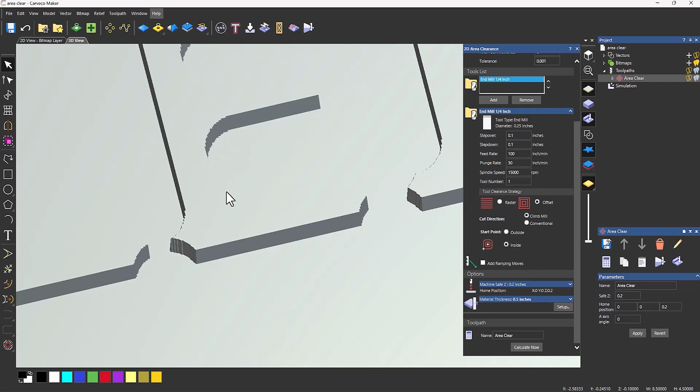Now, there are a few problems with this because the tool's too large. So if I zoom in here, you can see that the tool can't physically get in there. And it's also creating these rounded corners. So the only real way around that is to use a smaller tool. Now, you can either use a smaller tool if you're lazy like me over the whole job, just let it run. Or you can add another tool into this tool path, and then it will remove that extra material for you.

So if I add an extra tool, let's go down to a 1/16 of an inch. And then you can see it adds to the list there. And then I'm going to offset that, calculate that, and now you'll see that there are extra moves in there. And this is basically going in with the 1/16 of an inch tool and taking out those extra bits that the larger tool couldn't get into.

So if I delete this simulation now, I'll just center that, and then I'm going to simulate all of this again. You can now see that it's getting into those corners. Now, it's never going to get right into the corners because you've always got a radius on the tool. The only way that you could do that is have a really tiny tool.

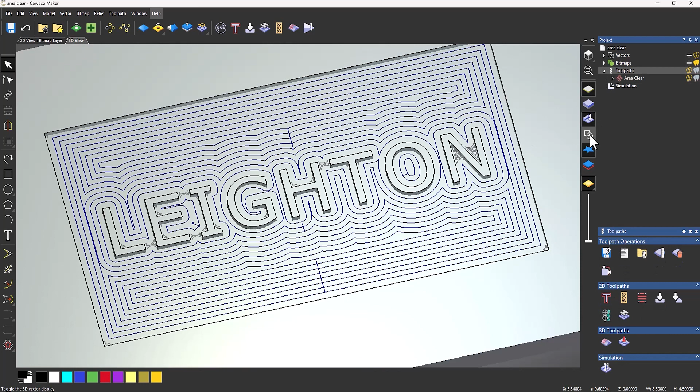Now, one thing that you can do with this after you've machined it is you can modify this. Let's say, for instance, you could add a chamfer onto the top of this. Make it look like something that you've drawn in 3D. So if I go to toolpaths, I'm going to just turn off the toolpath visibility, and I'm going to just select the text. Let's create a profile, and the finish depth, let's do this not very deep, let's say 20 thou, and I'm going to do this along. Select a tool, and I'm going to use a 90-degree V-bit.

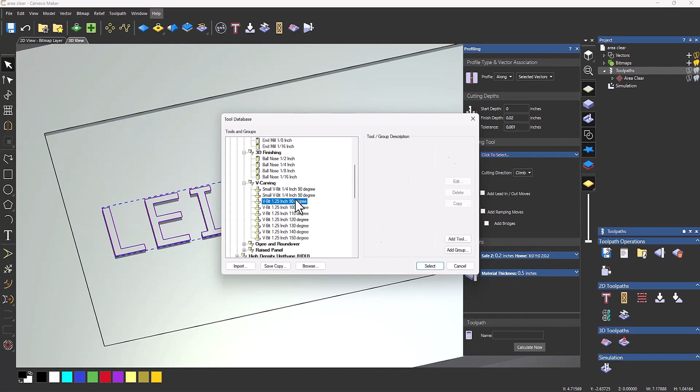And calculate it. And now if I simulate this, let's do the control bar. You can see what this is doing. It's adding a chamfer onto the top of that. The only thing to watch out for with this is that the V-bit can actually get right into the corners. So you'll see on the end here, I have this little extra bit there. Most of the time you won't really see it, so I wouldn't worry too much if you've used a small tool to begin with. Right, so let's take a look at 3D text.

So you're doing a machine relief on a 3D piece and you want the text to be standing proud. Here's my piece, and I've created these beagles on top of this base, and I've got some text. Now all of it in yellow is a relief, but the text isn't, and that's because I'm using Carveco Maker and I can't actually create 3D. I can only bring in 3D, so I can bring it in from the relief clip art library or importing in models. I can't actually create any 3D.

So normally what you would do is just create this in 3D, but I'm going to have to fool the program into basically not machining that area, and I'll show you how to do it. So if I rotate around, I'll turn on my 0 plane. Now the first thing that I need to do for this is to create a boundary, because I'm going to have to use vectors to machine to.

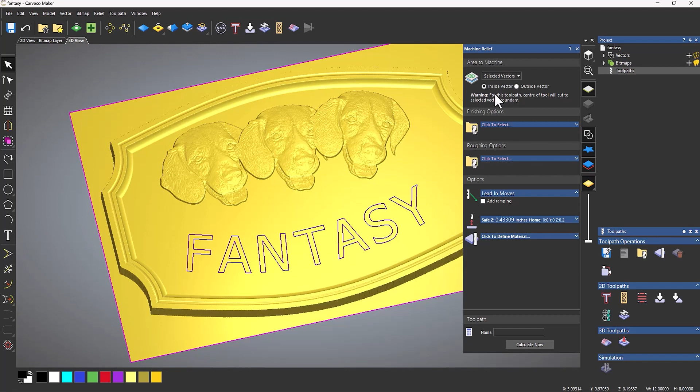And I want this to machine inside the vector. So don't worry, it's not going to machine inside this vector, it's going to machine inside the 2 vectors. Now, one thing that you need to watch out for is this warning message, and I'll show you in a minute. It basically says, for this toolpath, the center of the tool will cut to the selected vector boundary. So you'll see what happens. It's going to take out too much material.

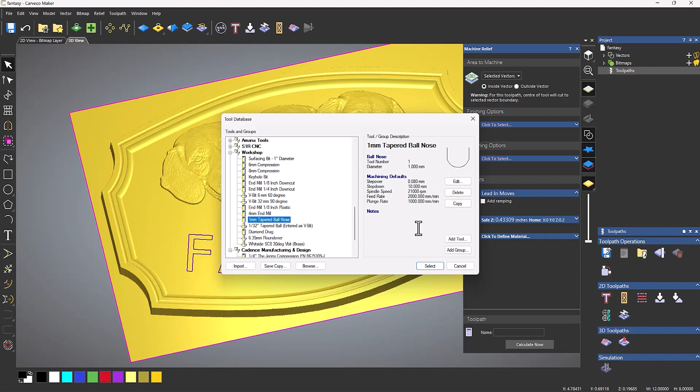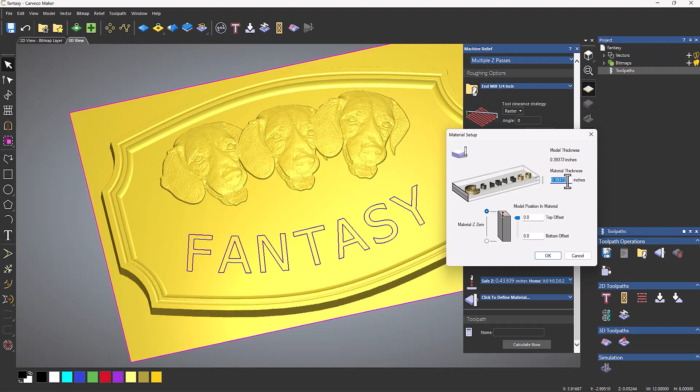So if I go to my finishing, I'm going to have to mix and match metric and imperial now. So I've got a 1mm taper ball nose. So I'm going to click that for finishing. And I've also got, what should we use for roughing? Let's use a 1/4" end mill. And then I'm going to define my material. Let's say that that's 1/2 inch. And then let's calculate now.

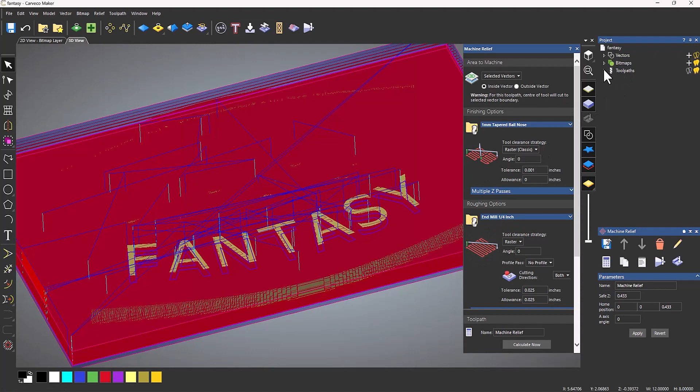Okay, so you can see that it's not machining that fantasy text, and that's going to be left standing proud. The only problem that I've got is that it says up here it's going to cut to the center. So it's going to actually overcut by 1/8 inch, half of that end mill diameter. But let's take a look at it. So let's take a look at the roughing, simulate that. And then let's simulate the 1mm.

Okay, so that doesn't actually look too bad. You can see that there are little bits on the text that don't look right, and that's because the end mill can get in further than the 1mm can. What I need to do is offset the vectors. I need to give it different boundaries that it can go to. So this is the hardest part about doing this. So if I delete the simulation,

this fantasy, I need to offset it. So go to offset, I need to go 0.125 outwards, sharp, and let's select offset. Okay, so that is the boundary for the roughing. What I need to do is group all of those so I know what I'm selecting. Now you can put these on different layers if you like, it's entirely up to you. What I'm going to do is just close that a second, draw a box around that. I'm going to deselect the original text, and then I'm going to go to group. So that's the one for the 1/4 inch roughing tool.

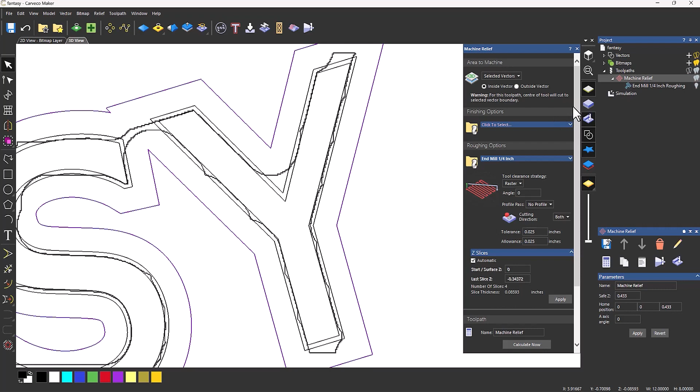So let's zoom out. Take a look at this. You can see that that's roughed all of that out. It's left the fantasy standing proud. So let's close the machine relief. And what I'm going to do now is delete the simulation, turn on the vectors, and I'm going to create another machine relief. This time, as I said, I'm only going to use the finishing.

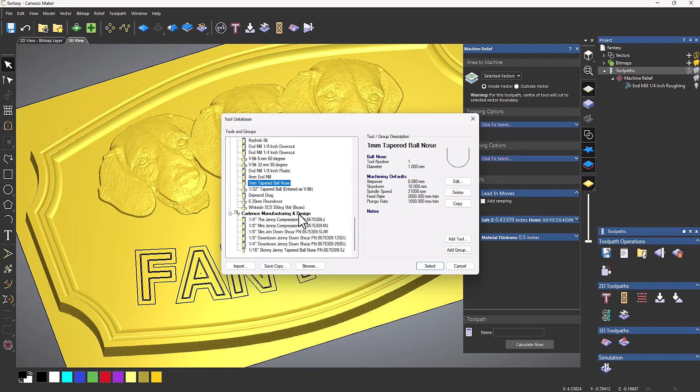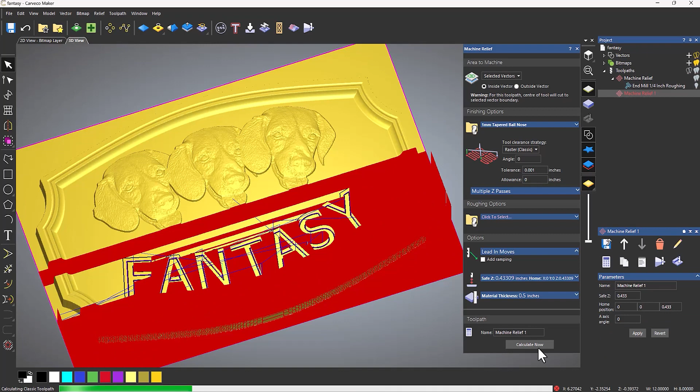So I used my 1mm ball nose. Make sure that you use the correct tools because otherwise it won't work. Click select. And that's pretty much all that I need to do. I need to make sure that I select that one there because this is offset by 0.5 millimeter or 20 thou. And then I need to select the outside there. Click calculate. This should finish exactly up to where the original text was now.

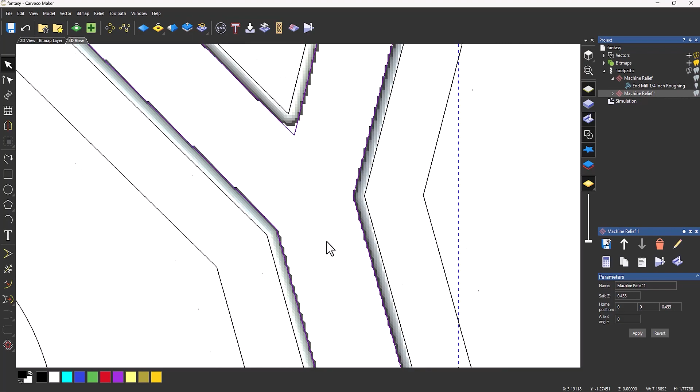So if I simulate that now, take a look at it, it leaves the text standing proud, exactly the size that I want. If I turn on the vectors and zoom in, you can see it's coming up to this original vector. So that's a couple of ways that you can leave text standing proud in your job, doing 2D area clearances and also machine reliefs on 3D jobs.